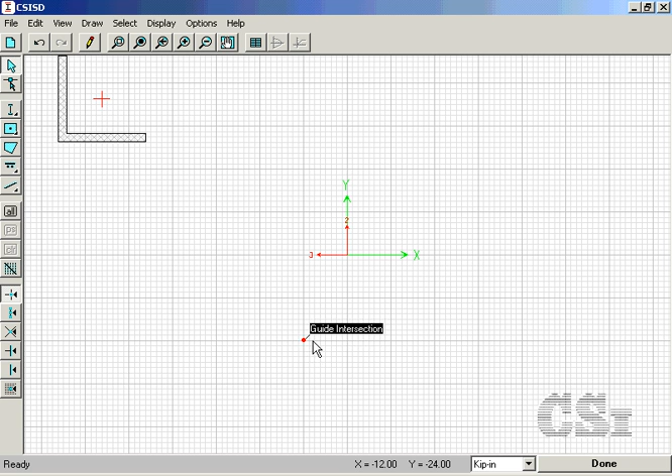The structural sections typically associated with steel shapes include wide flanges, channels, and others. A click on the grid locates the center of the shape, and a right click on the shape brings up the Properties box, where the material, size, and location may all be edited. There are also several solid shape templates, typically used with concrete sections. Again, a click on the grid locates the center, and a right click on the shape brings up the Property box, whereby we can alter the material, location, size, and reinforcing if concrete.

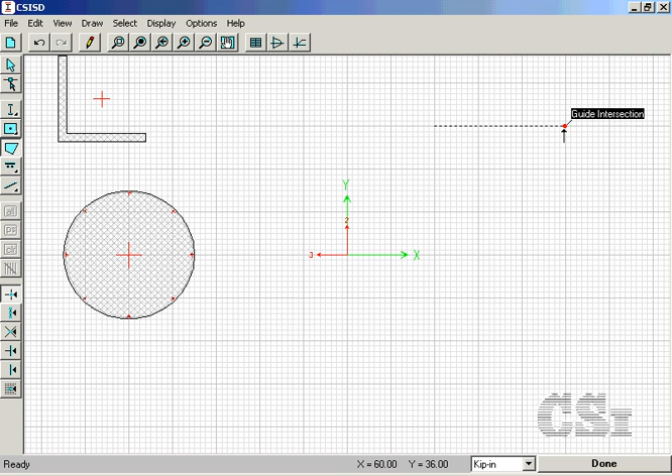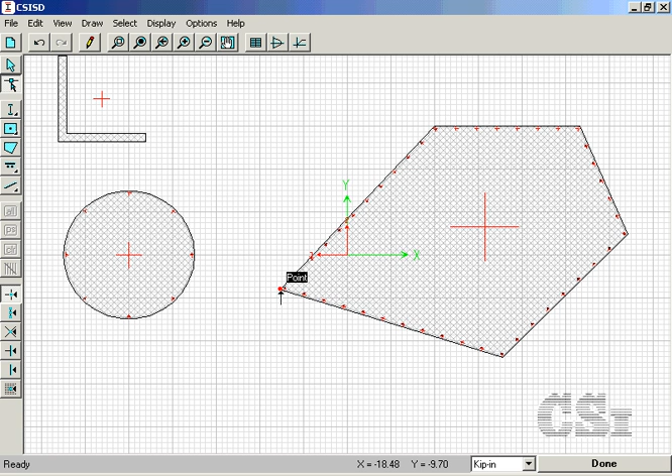Last is the Draw Polygon Shape command, where the user can draw a very arbitrary polygon. Again, this would typically be used for concrete sections. The Shape Properties box allows you to specify the material, and if concrete, the reinforcing. The Reshaper tool allows you to change the geometry of the poly shape by either right-clicking on a corner and typing in the coordinates, or simply by dragging a corner. You may also use the Reshaper command to move the shapes.

At this point, it should be noted that all three of the drawn shapes constitute a single section, and though one of the shapes is steel, the Section Designer utility will calculate properties for ETABS based on the equivalent base material of concrete. It should also be noted that only the member 2-3 axes have meaning for ETABS, as the XY axes shown are local references only.

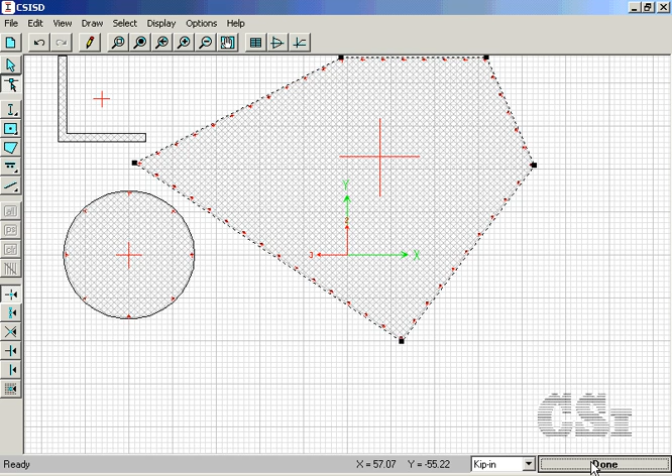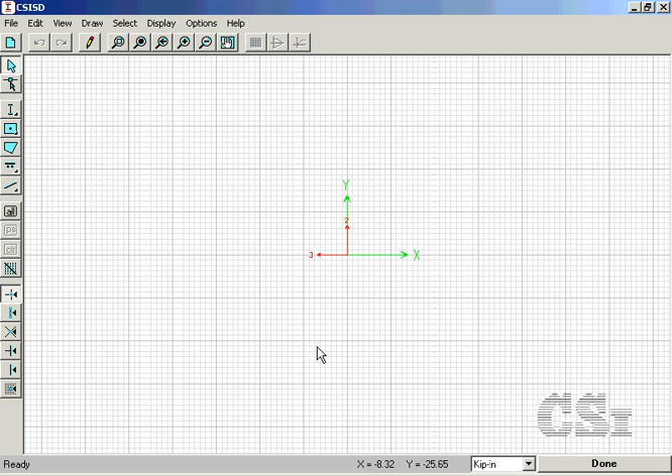For this example, we will create a rectangular beam section 12 inches wide by 16 inches deep. Reinforcing will be 2 number 8 bars at the top and 2 rows of 3 number 6 bars at the bottom. Cover will typically be 1.5 inches, except at the top where cover over the bars will be 1 inch. To draw the beam section, we will use the solid rectangle shape. A right click brings up the Properties Edit box, where we can change the height to 16 inches, the width to 12 inches, and ask for reinforcing.

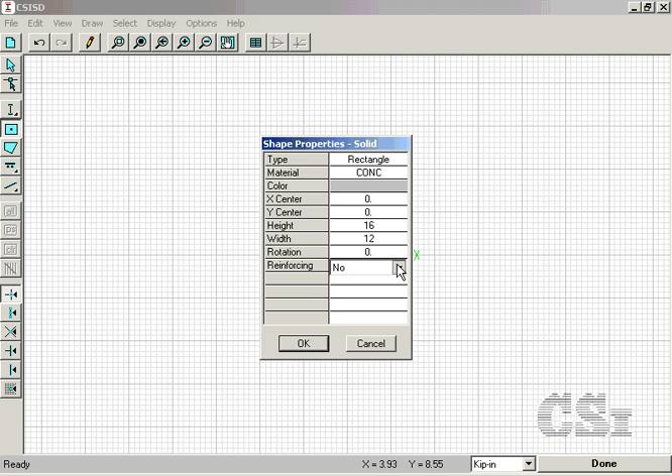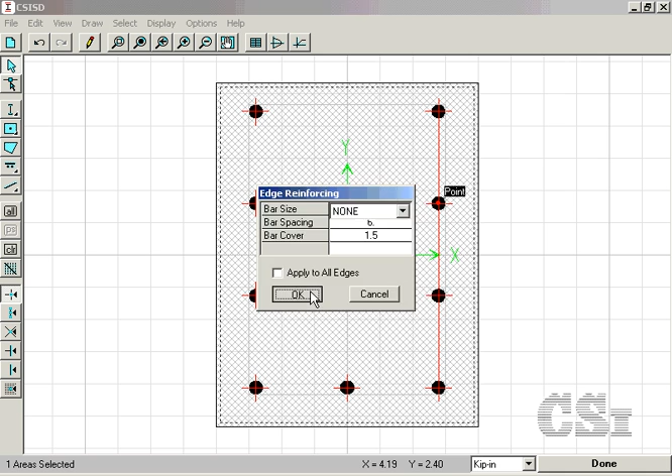Enlarge the view to make it easier to work with, and right-click on one of the edge bars. Set the bar cover to 1.5 inches and apply to all of the edges. Note that corner bars are located by the 2 adjacent edge covers. Right-click on the top edge bar and set the bar size to none, with a cover of 1 inch. Apply these changes to only this edge. Next, right-click on one of the right edge bars and set the bar size to none. Repeat this step on the left edge bars.

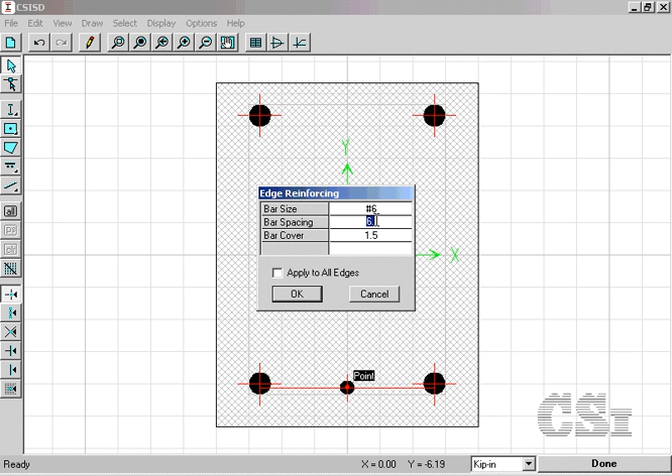Right-click on one of the top corner bars and set the bar size to number 8 and apply to all corners. Right-click on the bottom edge bar and set the bar size to number 6 with a spacing of 4.2 inches. Next, right-click on the bottom corner bars and change their size to number 6.

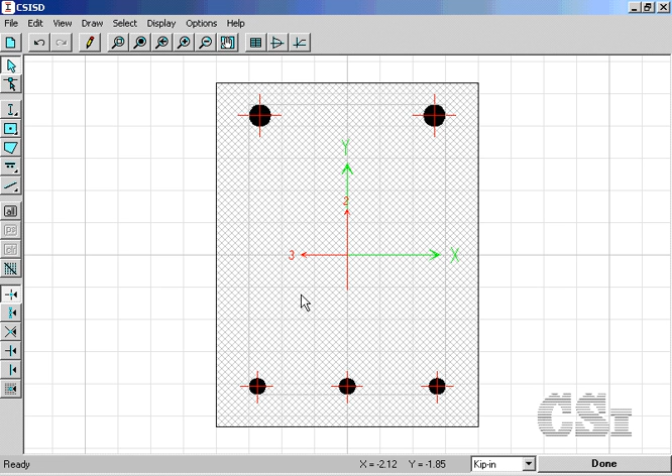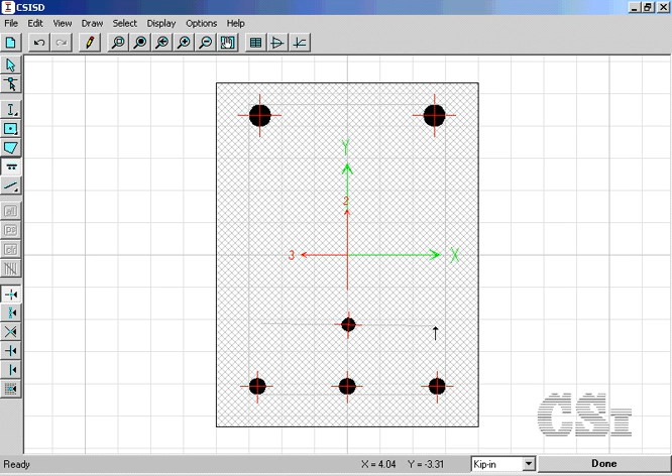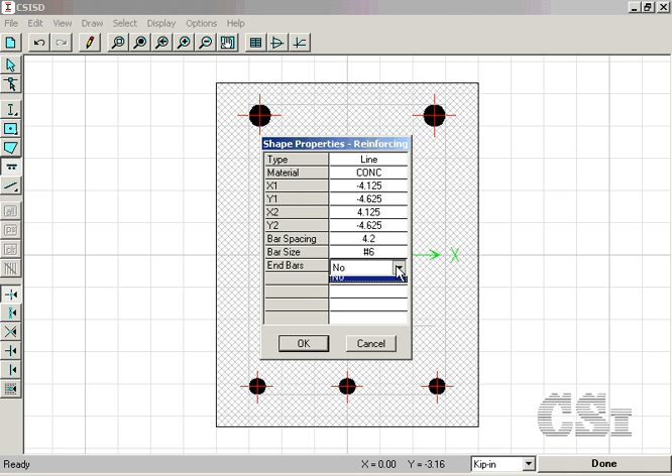The section is complete except for the needed second row of reinforcing in the bottom. This is done with the Draw Reinforcing Shape command, where we can add reinforcing bars as single bars, a line of bars, a rectangular pattern, or circular pattern. For this case, we will add a linear pattern, clicking to start and end the line. A right-click on this bar brings up the Properties Edit box, where we can type in the exact coordinates of the endpoints of the line. Change the bar size and spacing to match the row below, and ask that end bars be included. The section is now complete.

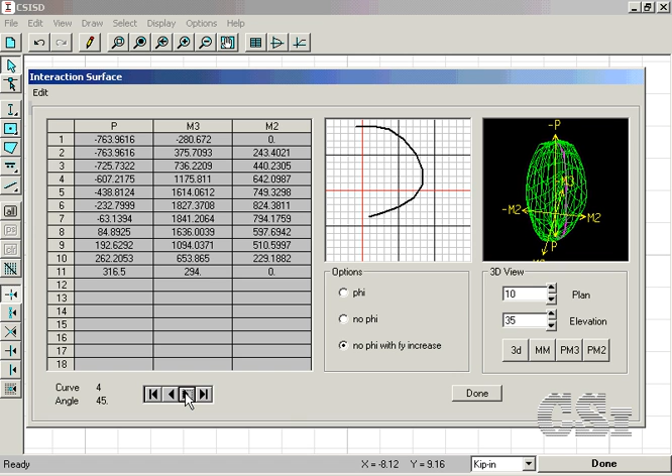Under the Display menu, we can ask for the calculated section properties, including the area, moments of inertia, and all of the other generated properties. We can also view the interaction surface, including a 3D view that we can spin around. We can also toggle through the various curves at different angle settings. Section Designer also lets you view the moment curvature curve for reinforced concrete sections. You may pass the cursor over the curve for specific values.

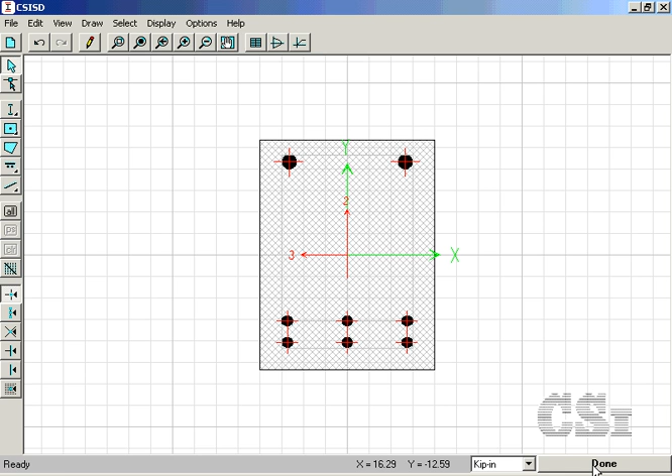The next step is to send the section information to ETABS by clicking on the Done button, and then OK to add the section to the frame sections list. Next, we will assign this newly defined frame section to the beams in our model. We will replace the conc beam property with the new SD property.

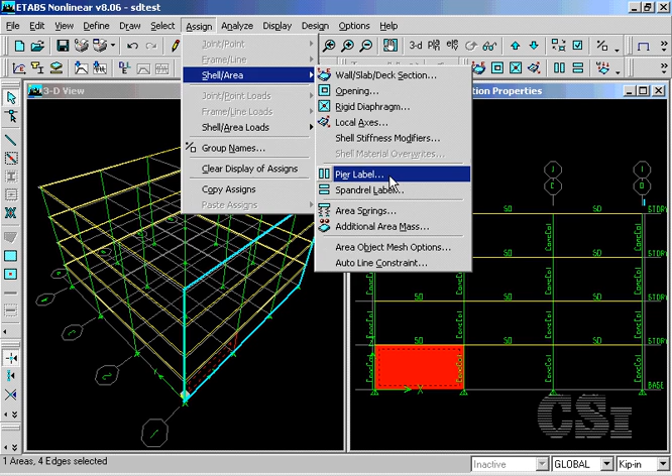As previously stated, we may also create or modify wall or pier objects in Section Designer. However, prior to doing this, the wall objects must be assigned pier labels. Assign this wall the label Wall Pier. Now we can go to Design, Shear Wall Design, Define General Pier Sections to access Section Designer. The base material will be concrete, and we will start from the existing wall pier, although we could create a completely new section as well.

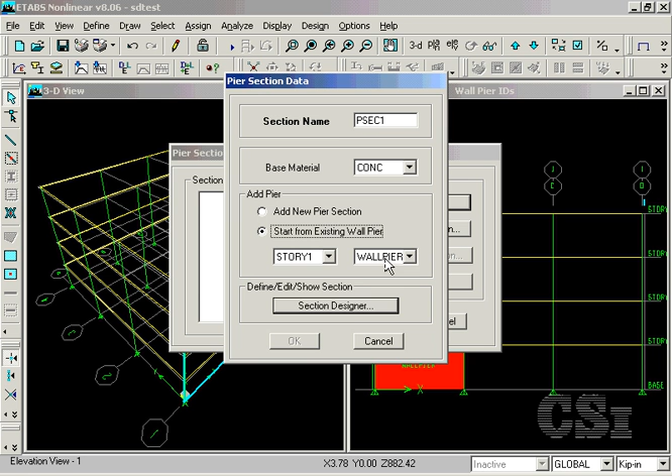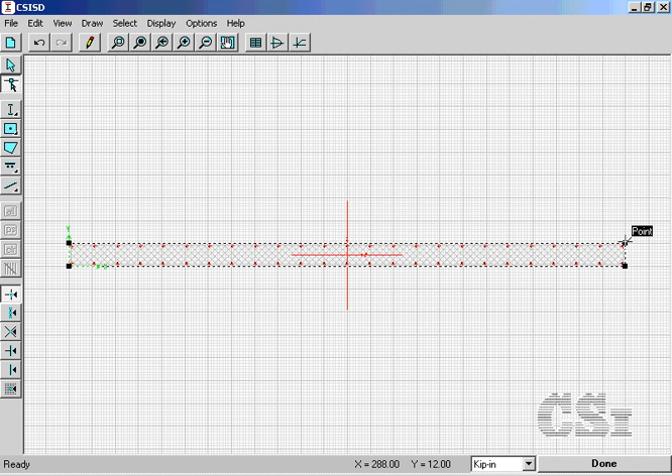The existing wall pier section is brought into Section Designer. The wall is a poly shape, so we can use the Reshaper tool, just like we did for the frame objects, to stretch and move the shape. A right-click on the bars brings up the Reinforcing Edit box, where we can alter the size and spacing. A click on the Done button brings us back to ETABS.

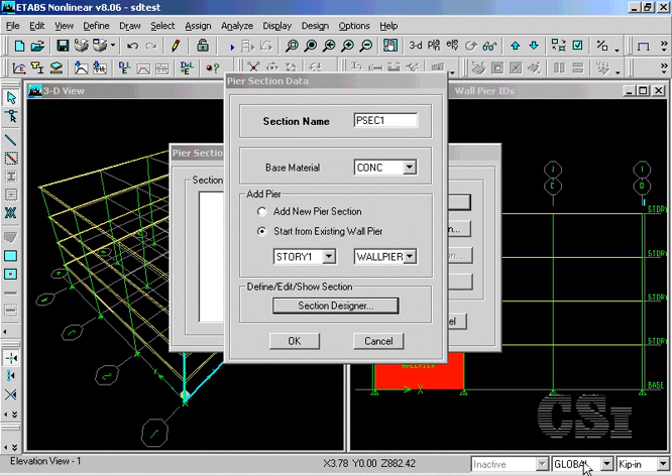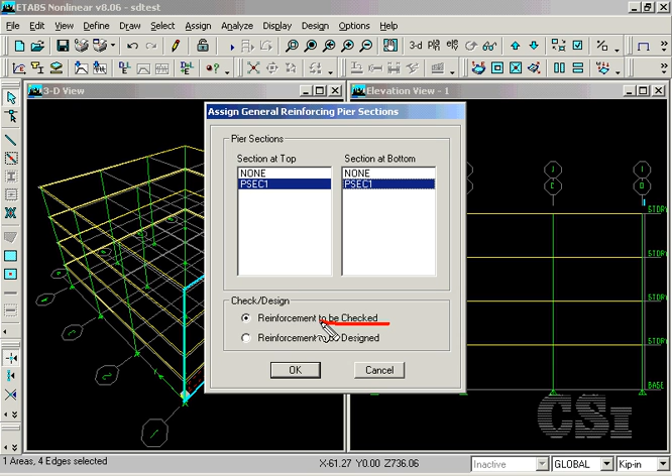Now we select the wall pier to assign the section that we just created. This is done through the Design, Shear Wall Design, Assign Pier Section Type. We'll use the General Reinforcing Section, PSEC1, at both the top and bottom locations. We will ask for the reinforcement to be checked. We are now ready to run the analysis.

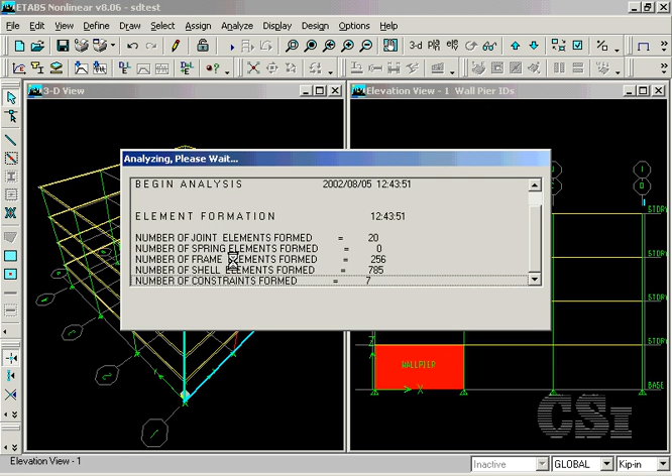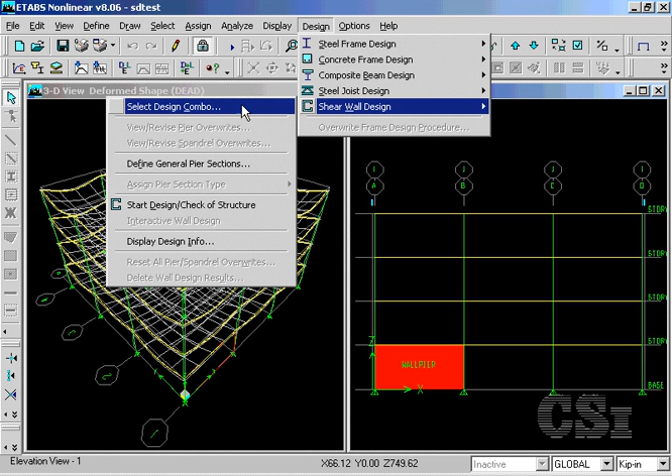Once the analysis is complete, we can start the design for either the concrete frames or shear walls. In this case, we will do the check for the shear wall to verify the reinforcing previously defined is adequate. A right-click on the section brings up the pier flexural check, where we can verify the adequacy of the reinforcing, as well as confirm the section used. This concludes this example.